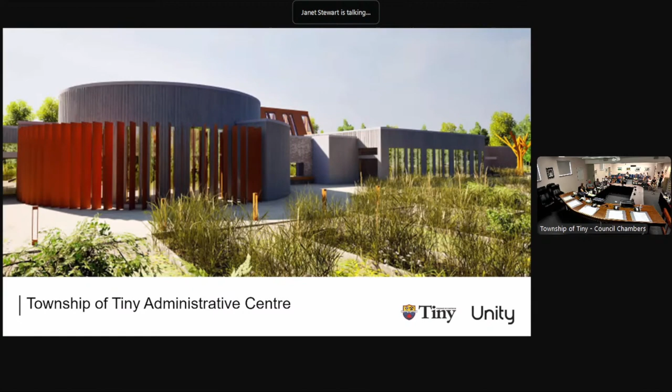Thank you, Tim. Thank you, Mayor Evans, Tiny Township staff, and thanks to all of you who have joined us in the council chambers and online this evening. I'm really pleased to be here on behalf of Unity Design Studios. Our team has been working with the township since last fall to develop a schematic design for the administrative center project. I'm pleased to have this opportunity to take the next 50 minutes or so to walk you through the design. We are asking for your suggestions on what types of public uses and public use spaces you would like to see prioritized in the design. So we are very much looking forward to your feedback.

To begin, at the outset of the project, we set 5 goals that we felt the project should strive to meet in order for it to set itself up for success for the next 60 plus years, as that will be the project's anticipated lifespan. These 5 goals are to employ low-impact site development strategies, to enable universal accessibility, to enhance public services and spaces, to achieve regenerative design, and to achieve resilience by meeting a post-disaster standard of design and construction.

So the first goal has to do with employing low-impact site development strategies so that we can minimize the overall impact of the development on the site. The site being township owned and having proximity to both the operations complex and the waterworks, and its potential to tie into the Tiny Trail system, offers us much beauty, much passive recreation potential, and access to the resources we need for this development.

Some of you might remember that decades ago, this entire site was earmarked for development as a potential industrial park, and then sometime later, potentially for aggregate extraction. But the intent now is to retain its public use for the administrative center, while also protecting and enhancing the site's natural features.

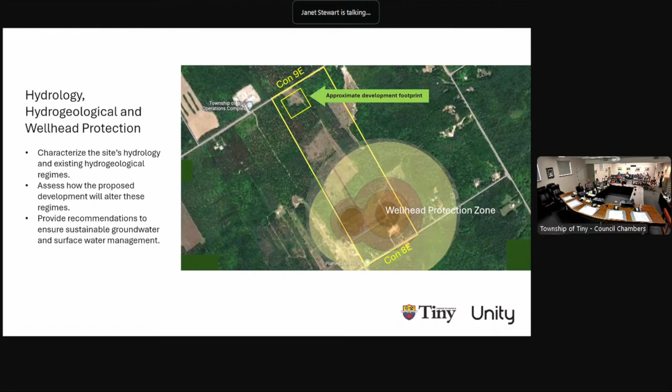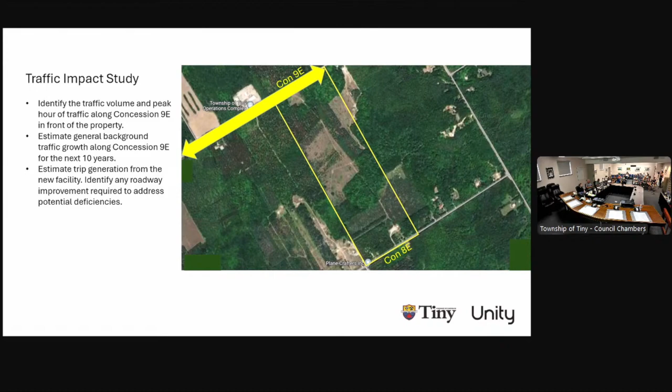This will be completed by an experienced biologist with specialist skills in plant identification. Overall, the study will include mapping of vegetation community types, screening for endangered butternut and black ash trees, bat habitat trees, amphibian breeding grounds, dawn and evening breeding bird species, and assessment of any potential species at risk. The assessments will require species-specific surveys and specialized methodologies appropriate to the season, time of day, and weather conditions. And what we will learn from this is what portions of the site can be developed, which should be avoided, and any opportunities for enhancement, restoration, or monitoring of any natural features.

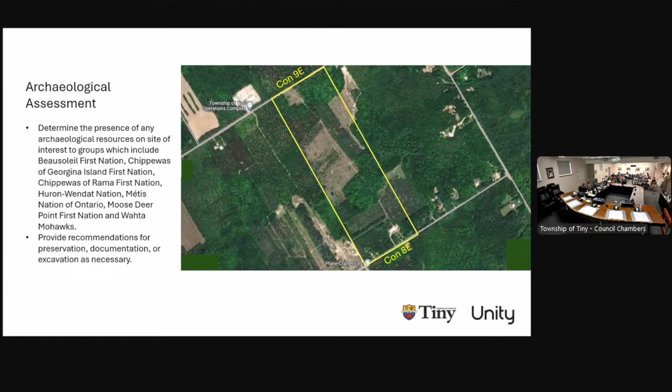And Mayor Evans has also decreed that for any tree required to be removed for the purpose of the development, 3 new trees will be planted. And in addition, we will ensure any lumber harvested as a result is repurposed in the construction of the development.

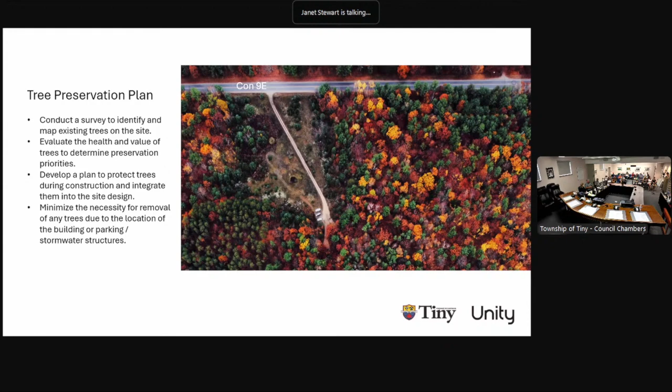Just going back to the project goals now, the second goal that we set for the project is to enable the highest degree of universal accessibility to ensure that the new administrative center will welcome and accommodate everyone, no matter their age or level of abilities. And universal accessibility is fundamentally about these three things: ensuring safety, dignity, and independence for everyone.

Tiny Township has a very diverse population of English-speaking, French-speaking, Indigenous, and immigrant permanent and seasonal residents, all of whom represent multiple generations and all who have varying degrees of physical and cognitive abilities, and all having unique needs. So inclusivity is what we're aiming to achieve so that everyone feels welcome and able to enjoy the facility as independently as possible and with the dignity that we all deserve.

Here in Ontario, we have many accessibility guidelines to follow. We have the Canadian Standards Association B651-18, Accessible Design for the Built Environment. We have AODA, Accessibility for Ontarians with Disabilities Act. We have the City of London's Accessibility Guidelines, which have been adopted by many municipalities across Ontario. And we have the minimum requirements as legislated into the updated 2024 Ontario Building Code. However, the one that we have chosen to use as our guide for this project is the Rick Hansen Foundation Accessibility Certification Guideline, which exceeds all the others in best practices and is one of the most respected accessibility guidelines across Canada.

So here's the concept that we've developed for the ground floor plan of the new facility with all of the major space uses identified. There is an area earmarked for a potential basement level on the left-hand side for staff facilities, records and equipment storage, and a new emergency operations center that has access to a freight elevator. The darker shaded spaces on this plan signify space devoted to administrative and departmental use, with the lighter shaded spaces signifying all public use spaces.

So let me walk you through some of the examples of the accessibility initiatives that we have incorporated in the design. There will be a passenger drop-off and pickup zone with clear markings, tactile accessible indicators, and ample space for maneuvering. The area will have ample illumination and be well signed. Accessible parking spaces will be clearly marked and have level access aisles and curb ramps. In addition, there will be tactile indicators leading to and from accessible parking areas to the main building entrances.

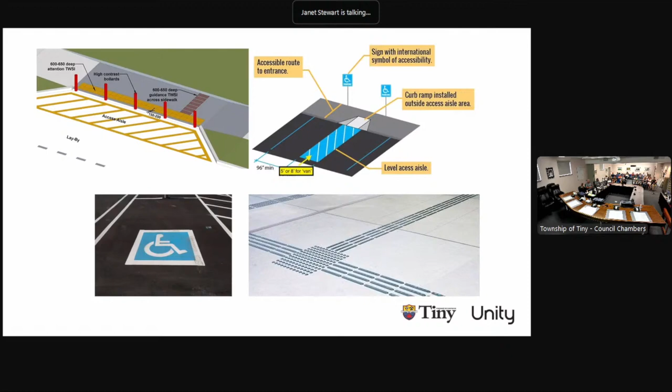There are 4 main building entrances: 2 front entrances dedicated for public use, and 2 rear entrances dedicated for staff. All building entrances will have accessible tower-style power-operated door activators, hardware, and access controls.

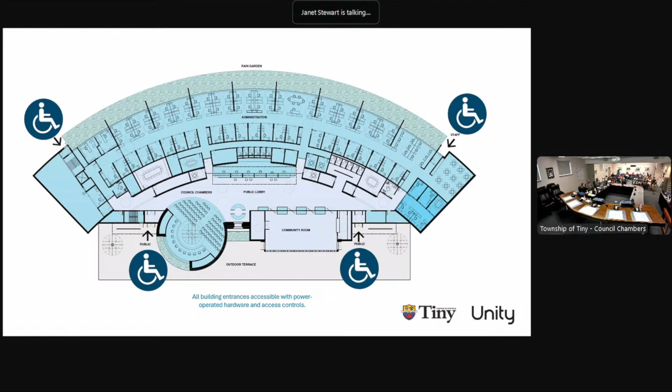Vestibules and public service areas will all be accessible and feature a logical arrangement of circulation routes and facilities, so there is little chance of being disoriented or getting lost. There will be fully accessible paths of travel to all areas of the building.

At the center of the public lobby will be a customer service counter. This counter will be universally accessible with variable heights for sitting and standing, adequate knee clearance, and privacy panels.

Nearby, centrally located, there will be gender-neutral and universal family washroom facilities for both public and staff adjacent to the lobby and customer service areas. The format for the gender-neutral washrooms provides everyone with a lockable private room equipped with a toilet and a wash basin for enhanced privacy and hygiene. So no 5-foot-high stalls with gaps around panels, no shared sinks.

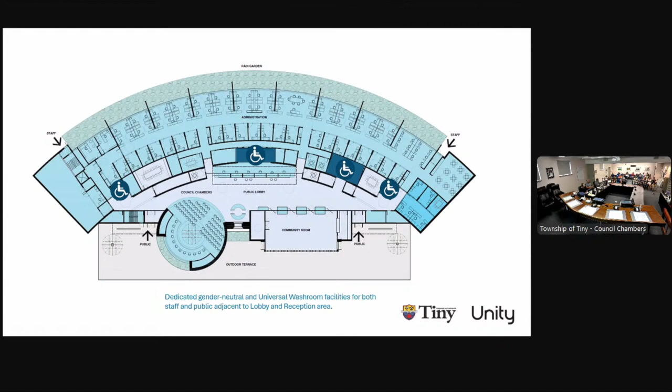There will be intuitive wayfinding throughout the facility, supported by a number of sensory techniques. You see three symbols overlaid on the plan, and the symbol on the left signifies signage, in this case Braille, and languages other than French and English can also be incorporated.

The second symbol signifies auditory experience and use of acoustic mitigation so that spaces do not become overwhelmed by sound reflections, which can cause confusion. And the third symbol signifies light levels and how varying levels of brightness and use of natural light can make navigating a building more intuitive and far more pleasant.

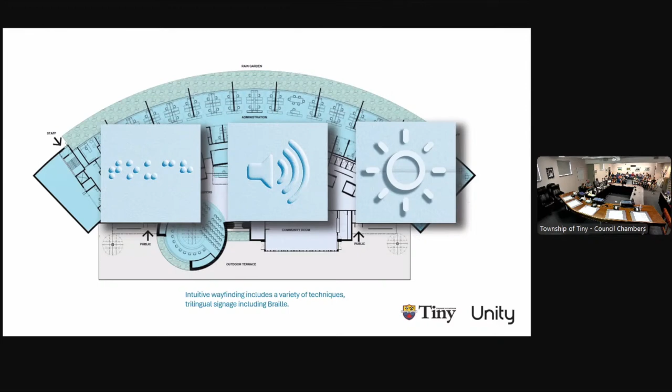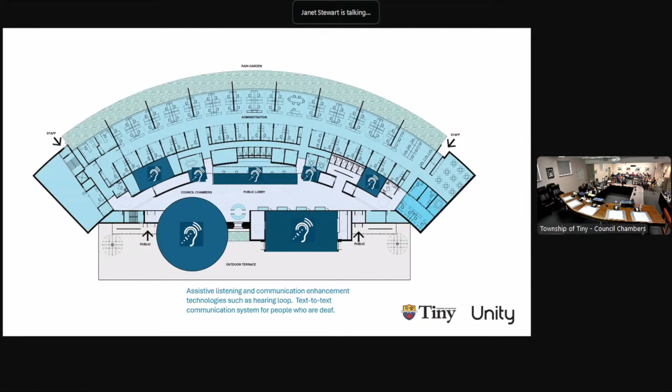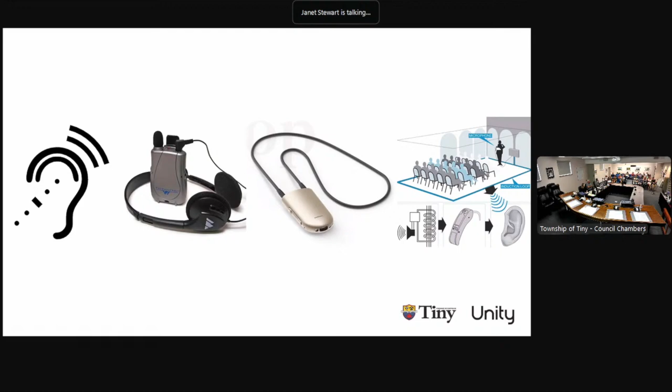Assistive listening and communication enhancements will be provided in the council chambers, meeting rooms, and customer service areas. These systems transmit amplified sound via hearing aids, headsets, or other devices. Some of the examples of the technologies available include infrared, induction loop, and FM systems, and portable systems are also available from the same audiovisual suppliers that will be equipping the conference and meeting spaces.

There are other measures we are mindful of in terms of accessibility, such as ensuring that all floor surfaces are slip resistant and have no disorienting glare or busy patterns, as well as ample clearance and supports for service dogs.

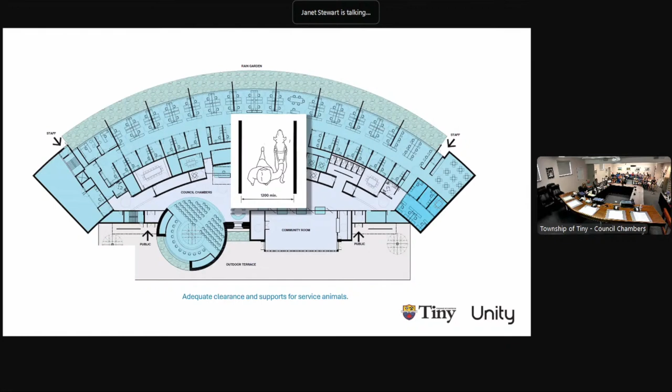Adding service dogs to our language of signage symbols is a way to include a working dog presence in our buildings, even when an actual service animal isn't there. Used with enough frequency and over a long enough period of time that it becomes learned and culturally recognizable, this will serve to normalize the presence of working dogs in public facilities.

Back now to the project goals. The third goal in the design is to ensure that we provide ample opportunities to enhance public services and spaces, whether it be spaces for public gatherings, indoor and outdoor, or opportunities for passive or active recreation on the site, or to have spaces to hold community group meetings or broader community events or celebrations. Even opportunities to display or incorporate the work of local artisans and artists. These are areas that we are specifically asking you for your input on what you'd like to see prioritized or incorporated into the design.

Let me walk you through the public areas of the facility.

We start with number one, the council chambers, whose circular shape and prominent location is very much a defining building feature. It will accommodate fixed seating for council and staff and up to 135 members of the public seated in chairs. The chambers will incorporate a retractable acoustic partition to allow for overflow into the lobby space and will feature a central skylight.

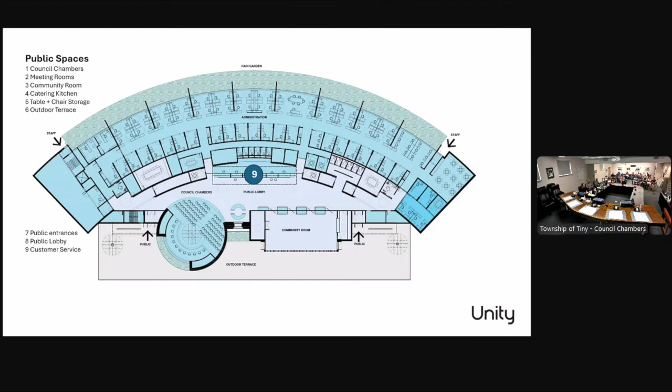The public lobby creates circulation that moves in a circular fashion, so navigation is intuitive and there is less opportunity to get disoriented. The public lobby itself is meant to be a dynamic space anchored by the public service counter in the center of the space. Above the counter will be a linear skylight that will always flood the lobby with natural light at any time during the day.

The lobby will also double as a gallery space, featuring curved stone walls intended to be a backdrop for showcasing community arts and artifacts. There's also going to be public seating along the perimeter of the community room, across from the customer service counter, that has direct access to the public washrooms. Additional opportunities to incorporate the work of artisans include a permanent feature wall in the lobby, an outdoor sculpture at each entrance, and a decorative screen on the outside of the windows into the council chambers, all of which could be the subject of a public art competition.

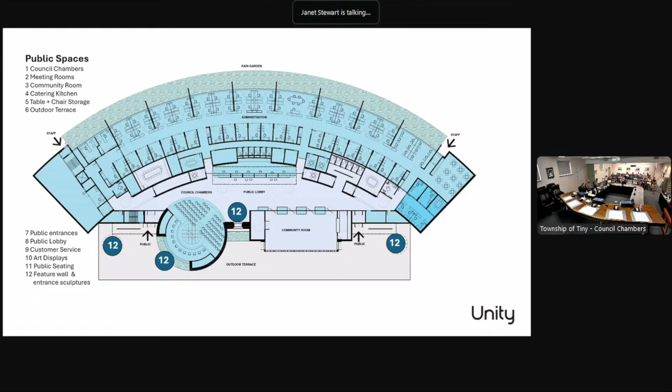Once our site studies are complete and we have sited the building, there will be future opportunities to develop and connect to other public features, such as seating areas, passive recreation areas, and trails across the site. So we hope you make note of some of these features and let us know what you like, or perhaps what we have missed.

So I'd like to share with you some schematic renderings of the interior and exterior of the building to give you an idea of the look and feel that we're proposing for the spaces.

This first view is an interior view of the public lobby with the main public service counter on the right. The major materials you can see here are natural wood, natural stone, glass, and polished concrete with metal accents. Looking at the right-hand side, you can see the public service counter with the long linear skylight above that provides the space with a dramatic connection to the sky.

The intent here is to utilize the structure of the skylight to create portals for privacy between distinct service areas. These portals could be created with panels of perhaps metal, made by metal artisans, or finish carpenters out of wood. The counter is long enough to provide service kiosks or computers for public use as well.

On the left-hand side are large pivoting panels that open up from the community room, featuring soft seating between the panels to create a linear lounge area. What look like leaves that have blown into the space from outside is a suggestion of thin bronze metal sculptures embedded directly into the concrete floor, something that might enchant children and adults alike.

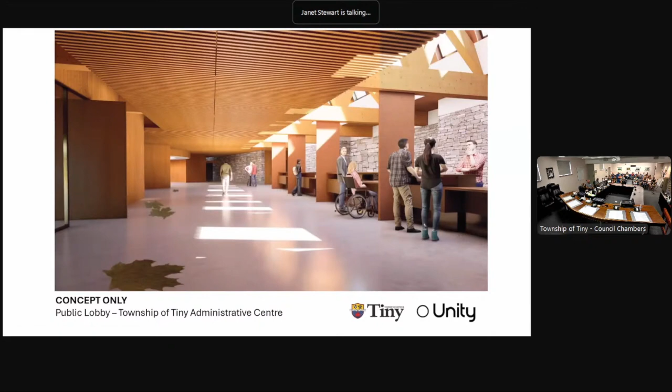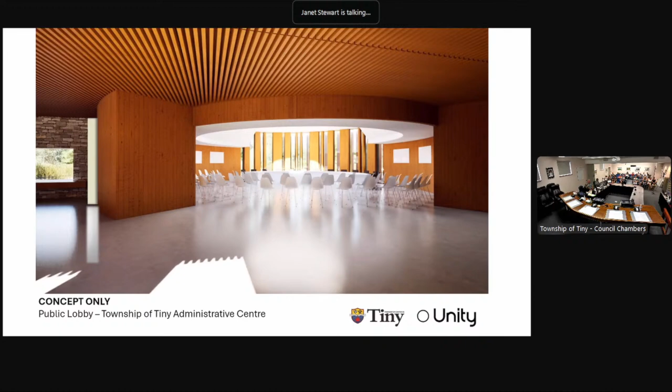In this view, we are looking at the council chambers from the public lobby with the acoustic partition fully retracted, so you can see the overflow that we can get from the chambers into the lobby. To the left of this view is a seating area with a feature wall whose design, again, could be the subject of a public art competition.

In this view, we are in the council chambers to give you a sense of the scale and quality of light. The chambers will undergo detailed design to ensure that all technologies related to connectivity, audiovisual, accessibility, sightlines, security, lighting, and appropriate furnishings are accounted for and well integrated.

All offices are on the interior with all glass fronts to take advantage of the same light and views. Staff growth has been factored into the design in a modular fashion, with an additional bay accommodating 3 offices and 8 workstations added for this purpose. We would like to point out, as Tim mentioned earlier, that all sizes for workstations, offices, and meeting areas follow the new December 2023 Ontario Public Service Workspace Guidelines.

Moving now to the exterior, here's a view of the outside of where we just were. We can see the curved administrative area.

Here we intend to capture rainwater that will fall from a shallow sloped roof along the perimeter of the building. It'll fall like a curtain into a rain garden that will recharge groundwater, because we are managing all stormwater features on the site.

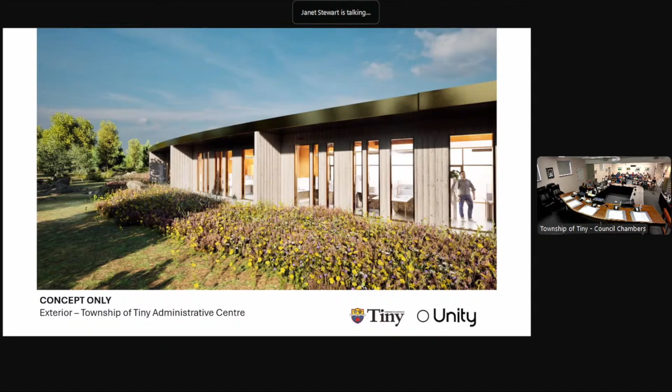Here's an aerial view of the building. You can see the curved council chambers in the front, the community room to the right, and entrance canopies along the exterior terrace. Much of the roof will be flat, having drains so that we can harvest rainwater.

There will be a shallow sloped roof to shed water into the rain garden along the perimeter of the curved area at the rear. You can see the skylight at the center of the council chambers and the tall linear skylight above the customer service counter in the public lobby.

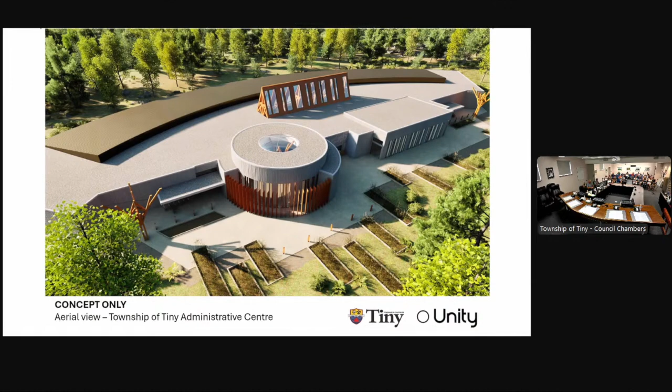Back now to the project goals, number 4: to achieve a regenerative design, the highest level of sustainability for the project, for educational, environmental, and economic reasons.

Educational, to illustrate how a building need not be complex, but can be actually rather simple in its approach to achieving a regenerative design. The environmental reason: to promote responsible resource use, conservation, and biodiversity. An economic reason: not just to invest in long-term delivery of public services, but to increase resilience to severe climate events, probably the township's greatest risk, and to promote energy security, as well as an emerging local bioeconomy in renewable forestry products. Just a note on the difference between sustainable and regenerative.

A sustainable design focuses on minimizing negative environmental impact by using resources efficiently and reducing waste and emissions. By contrast, a regenerative design goes beyond sustainability by actively restoring and improving the environment, creating a positive ecological footprint and enhancing the health and resilience of the surrounding ecosystem. This involves integrating natural processes, promoting biodiversity, and contributing to the regeneration of natural systems.

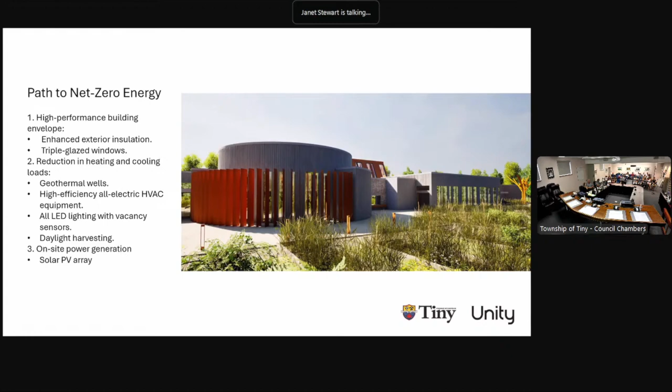And why are we doing this? That's a great question. When we factor that this facility will be completed likely in 2027, that's 3 years short of the 2030 target for Canada to achieve a 45% reduction in emissions. We also think about the lifespan of the building, that it's only 23 years short of the 2050 zero emissions target. So it just makes sense to build net zero operational emissions into the project now, while there is funding available to pay for that, because when zero operational emissions become legislated into national and provincial building codes, that funding will likely disappear.

And for this, again, we have a 3-step path. The first step is to employ a structure made up of what's referred to as mass timber, or cross-laminated timber panels and glue-laminated columns and beams. Utilizing the mass timber structure is by far the best strategy to achieve net zero carbon, because the amount of carbon naturally absorbed from the atmosphere in the course of growing the wood in a forest far outweighs the amount of carbon emitted in the manufacture of all the other materials used on the project. There's an added bonus to using mass timber in that, given the demise of the pulp and paper industry largely across the province, we can promote an emerging CLT and mass timber industry across Ontario.

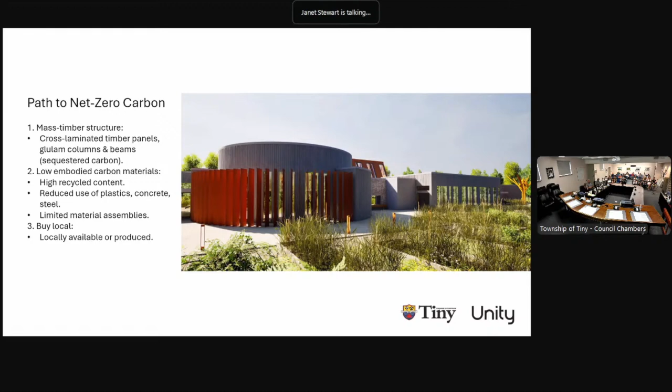Up next, our path to water conservation. This is a 3-step path again. The first step is to harvest rainwater, which we're getting an awful lot of recently, and use that for any irrigation or gray water conveyance. The second step is to reduce water usage by employing low flow fixtures, water conserving appliances, and condensate recovery on HVAC equipment. The third step is to use drought-resistant plantings for any landscape buffers, which will eliminate the need for irrigation altogether.

And why are we doing this, when Ontario's 4 of 5 Great Lakes collectively account for about 84% of North America's fresh water and approximately 21% of the world's surface fresh water, and besides, we have a municipal water line bisecting the site? We're doing this because excessive water withdrawal can harm aquatic ecosystems, and climate change can alter precipitation patterns that lead to periods of drought. By reducing water demand, we decrease the strain on municipal water infrastructure, much of which is already at capacity across Ontario.

We reduce energy needed to treat and convey water. We reduce energy utility bills and future-proof buildings by making them more resilient and economically viable. So again, this project can lead by example, utilizing this path to water conservation.

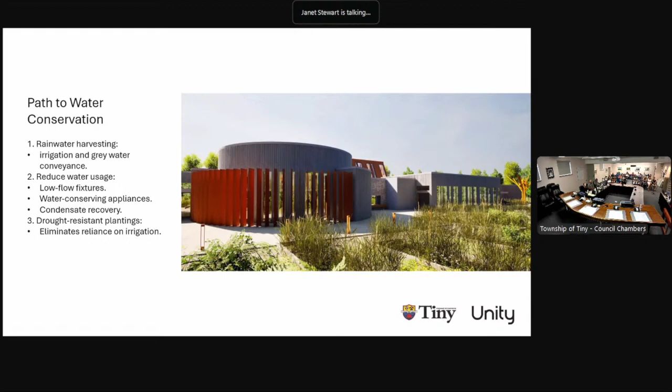Our final path is to biodiversity, which is another 3-step path. The first being by having committed to limiting our development footprint on the site through achieving project goal number 1, our low impact development initiatives, we limit our disturbance on the natural landscape. The second step is to provide native plantings to support local wildlife. And the third step is to encourage habitat connectivity by planting pollinator gardens and supporting and connecting existing wildlife corridors, which will be identified in our environmental sustainability plan.

Why are we doing this when Tiny's forests and farmlands vastly exceed its urban areas? Because in 2022 in Montreal, Canada was instrumental in driving the United Nations to adopt Canada's biodiversity plan globally, which resulted in investment in Canada of $800 million in Indigenous-led conservation initiatives. Ontario's biodiversity contributes significantly to Canada's overall ecological health, making its conservation of farmland and forests important biodiversity initiatives beyond provincial borders and of crucial importance in Tiny Township.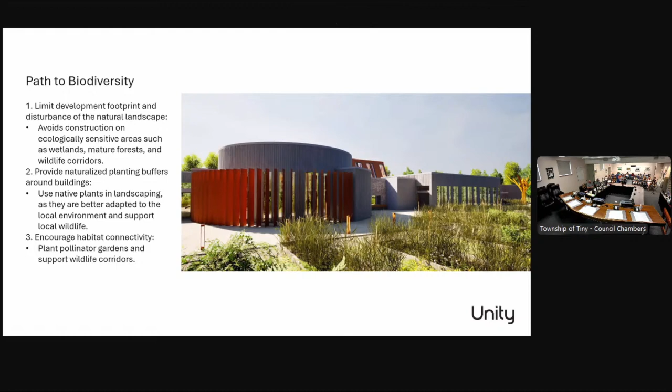And so that concludes Unity Design Studio's portion of the presentation, walking through some key environmental, public space, and accessibility initiatives of the project. Again, we thank you for your time and are grateful for any feedback that you can provide to us. And I now hand it over back to Tim to review your questions.

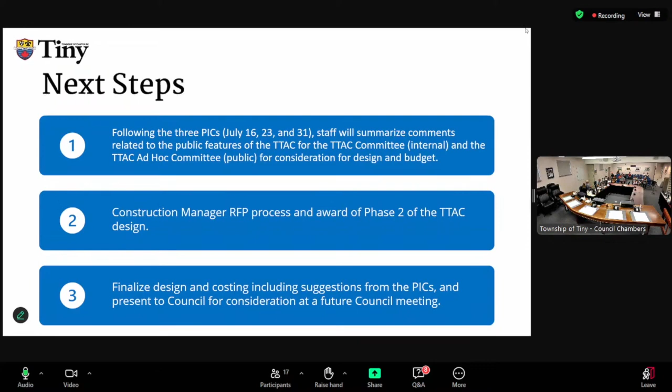Next step, obviously, is the construction manager at risk - the RFP process will be going out soon. August 7th at the council meeting, we'll be looking at phase 2, and council is going to be discussing moving into phase 2. Phase 2 with the architect will kick off the detailed design and allow us to move forward with this facility.

And then we're going to finalize design and costing to include suggestions from the PICs, and we're going to be presenting this to council at future council meetings. So this will all be very transparent. When the costs are all known, we'll obviously keep everybody up to speed with staff and make sure council and the public is updated. We'll continue to keep our website updated with all the latest and greatest information so you can read about what's going on if you can't attend a council meeting.